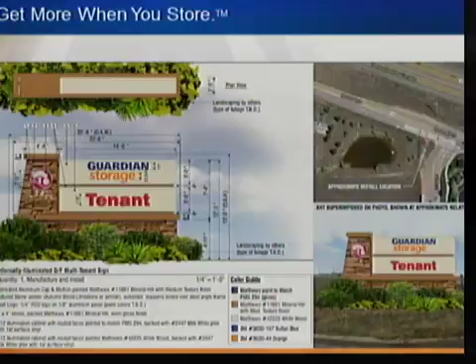One thing I do want discussed is we put two designs here, one where we would have Guardian storage on the top and a blank panel on the bottom. We've requested that until a future tenant comes in, we're able to utilize both panels of the sign. I brought that up to the Planning Commission, and it was unanimously decided.

The statement was made, well, it's Guardian's sign, they should be able to do what they want with it. But I'd like to go a little further than that for my request and give some justification for asking for that until another tenant might come in. We're going to make a significant investment in this sign.

It's going to cost, between the masonry, the sign, the site work, the landscaping, and bringing power to the sign, almost $60,000 for us. There are some significant benefits to the town. We're dressing up a corner that could use dressing up, frankly, at one of the gateways to the town. There's a drainage issue that Jim can talk about that we're going to correct through our site.

Again, we think it's a positive project for attracting developers to the area. Really, the alternative is to have a blank panel, and I just don't think, in my opinion, that is necessarily a positive thing. To me, it says recession. So, taking this all into consideration, we would like to utilize both panels until a later time.

I'm happy to answer questions when Jim is done, but I'll let him get to the engineering stuff.

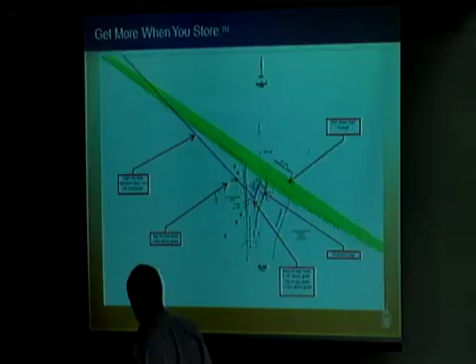A little enlarged detail, this is just the engineering plans showing curb and gutter and some new pipe work. This will be a grouted basin, so it won't be quite as attractive for snakes to hide out in there.

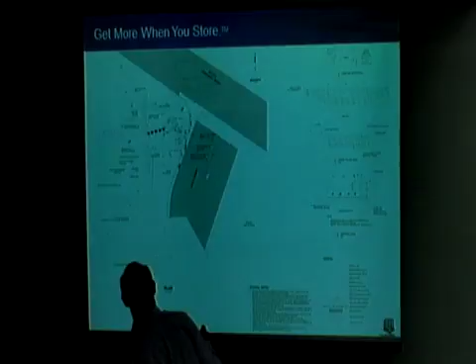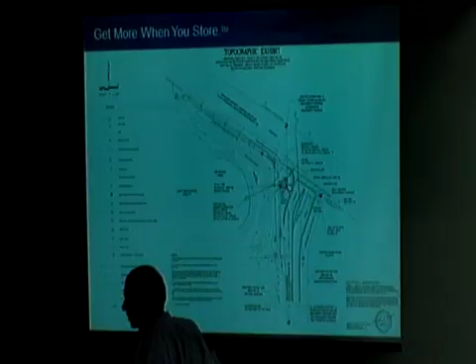This is just an exhibit of existing topography. You can see the dry utilities through here, and there's actually a legal description in the exhibit that's been prepared for the sign itself that doesn't show up at this scale.

Landscape. So as part of this project, we will landscape this corner. A lot of low water use plants will be seeded and dressed up. It won't look like the irrigated bluegrass turf that we have by Costco, but it will look definitely a step above what it is now.

It will have, there actually is a water line right here, so it'll be irrigated off of that existing main.

The plantings that were in the elevation view are maybe a little tropical. That's not exactly what is planned. I can't read these here, and I didn't prepare this plant list, but they are listed here by the landscape architect.

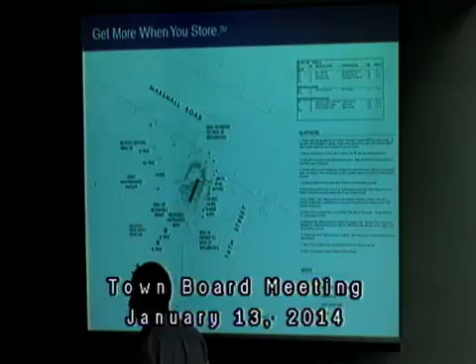So, any other questions? Trustee Gross? Actually, this is for Kevin. First of all, how's your business going?

We're very happy with where we are to this point in lease-up, and the community's really received us well. Good, and a long way to go, it's early in the game, so you got to keep your foot down, but we're very pleased. Good to have you here.

Thank you. To me, this is a no-brainer. I mean, obviously, I'm going to vote for it. I think both panels are yours. You're putting up the money. You should do it.

When a new tenant comes on board, would you hold on to both panels, or would you go back to the other design where you're on top and somebody else would be at the bottom? Because of the investment we have in it, having another developer in the area, we'd want somebody to pay us for half the cost, because I think that's appropriate and fair. If somebody was willing to do that, I don't want to say 100% certainty, but our intent is to share that panel with somebody else.

It's a significant amount of money for us to recoup. I don't really think at the end of the day, we wouldn't have done this project if it didn't work on one panel. It just wouldn't have, it'd be a waste of money. So we can make one panel work and recoup a lot of our investment by bringing in somebody else. So it's just something we want to have the flexibility to do until that time comes, because it could be a year down the road, it could be 10 years down the road. So that's why we've made the request.

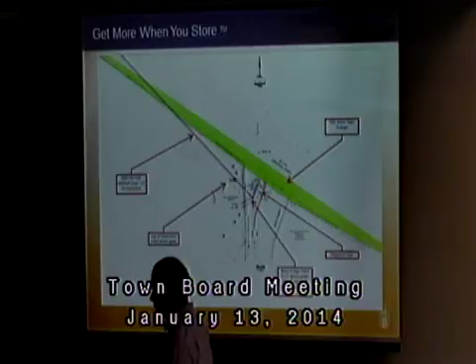Trustee Williams: Being that this is a CDOT right-of-way, I don't know how we can guarantee anything, because I've put signs there in the past and CDOT just takes them. They don't even ask, they may just do whatever they want. Sure, it's gonna be hard to take this one, but CDOT is CDOT, and that's not their right-of-way, actually.

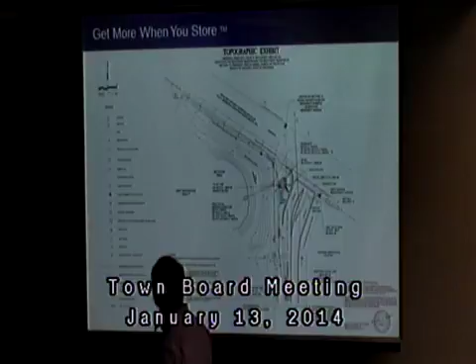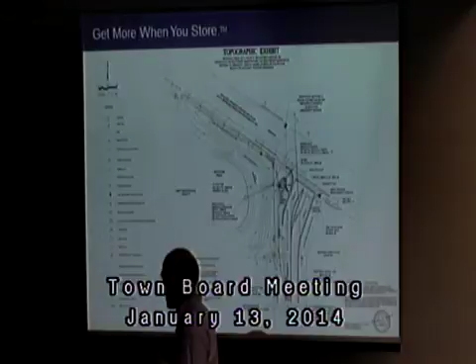It isn't? It's not, CDOT's right-of-way is right here. We do have an access permit already from CDOT, because there was a perception that potentially during construction there could be a temporary traffic impact. We also did a little bit of vegetation control on their property to evaluate our sight lines. So we do have the permit, but it's not in CDOT's right-of-way. That's good to know, so they can't just decide your sign is in their way? They can't do that, it's not in their right-of-way. Okay, that would be my only concern.

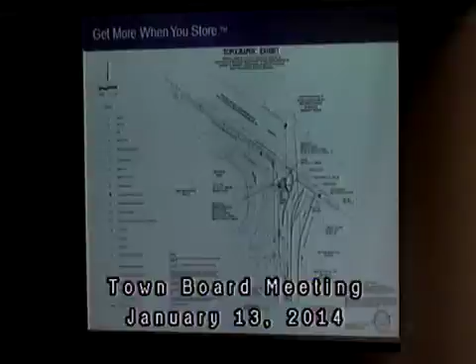Trustee Skumatz: My question is just whether the use of both placards, or whatever you want to call it, puts Guardian Storage outside the sizes that we've allotted to other businesses, and by how much? Yeah, they would have additional sign square footage just by using both tenant sign locations. I think the tenant sign dimensions match fairly closely what's in the marketplace, and they are only allowed one tenant sign per business.

So I had a couple of questions. Can you describe what the materials are? I mean it's on here, but there was some discussion at the Planning Commission about materials. I think it's the same sandstone that's on the other monument sign. The one question was on the base and the cap, I think. On this part right here, there was a concern about it looking like sheet metal, and a request was made for it to be either stoned or have a brushed finish.

And we elected for the brushed finish, as you can imagine, because it is less expensive than making it stone all the way through. But I think everything else... and I don't know what the...

Why does that need to be there? I mean, from a construction standpoint, I don't know why that needs to be there at all. Well, I don't know the answer because our sign company designed it, but I would think you need kind of a flush surface. Maybe not, I don't know. I don't remember what's in the town center, in the marketplace. I think it's stone. Yeah, it's stone. From an eye test standpoint, driving at 70 miles an hour or 30 miles an hour on Marshall Road, I don't think...

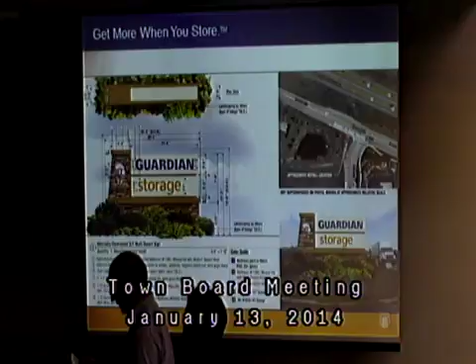We have some shrubs, Woods' rose, red twig dogwood, and white Meidiland landscape rose, and some ornamental grasses, blue avena grass, some ground cover perennials, Shasta daisy, English lavender, and deep blue lavender.

Okay, and who's... I don't know. The dogwood was helpful, I recognize at least one out of that. Well, we have specific standards in our code for plant species, and they have to pull from that list. Okay, and that's what they pulled from?

And who's going to be responsible for the maintenance of that? The town is. We're going to install it, we're going to get service to it, but the town will be responsible for the landscaping.

So that'd be unusual, because the marketplace takes care of theirs, right? The monument signs - there's certain aspects of the marketplace signs that we actually maintain. And there's certain landscaping that we maintain. It's kind of a mix and match, depending on where it's located.

I think we take care of the medians and things like that though, right? Yeah, and some - the corner monument signs, the lighting in there, and I'm not sure about the planting or the irrigation, but the roundabout, we maintain that.

What about the other signs that are along that same road, Marshall? No, those are maintained by Brixmor.

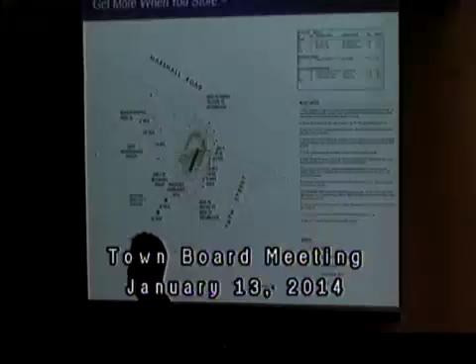Because it's connected to the CDOT facility, CDOT turns off the irrigation whenever they want, and the trees planted out there die. So now we'll be able to better control the irrigation to that landscaping, which over time will help improve the look of that whole site. No, because the CDOT site is an eyesore, they don't take a lot of pride in their landscaping. No, not so much. So whatever we can do to help, I mean, it's the gateway into town.

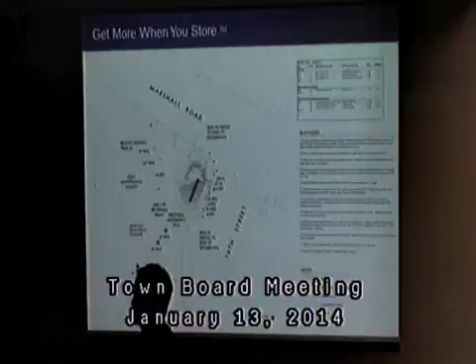That doesn't really give you a great first impression of how things are when you drive in that direction. Agreed. So you'll be in contact with the owners of the cell tower? Yes, Sprint, and we have been talking to them at the end of last year and this year, as Kevin's been advancing his proposal about extending that irrigation, getting new trees planted since they've died again, and moving forward from there. Once those trees mature, it should look a lot better than it does.

All right, so you were on top of that situation. I'm fully in favor of this, I think it makes sense. I want to make sure we have, sounds like we have some leverage, but I don't want to get into an argument, I don't want to add another sign out there, is what I'm saying. This is the only sign that's going there. And if we have a business going there, I'd want to make sure that second sign is going to become available for use.

And then my only other comment is that the sign looks a little big to me, but maybe that's just my impression. Trustee Sterling, and Trustee Skumatz, on the second panel issue, I was actually wondering how many potential developers could we have on 76th Street? Well, there's...

Four remaining property owners, privately owned: Turnbull, Way, Kelly, and then a small one acre piece, and I'm not sure who the current owner of that is off the top of my head. So potentially four developers, and if those get divided up with lots and stuff, there could be different users in there.

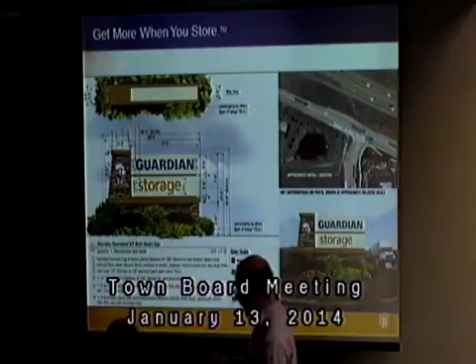It doesn't concern me even from a sight distance standpoint, because our setback of the sign, this might make sense. Our sign, the base of our sign is right here. You can see how far it is. Well, you can almost see the turn lane right here.

There's a lot of technical challenges with putting in a turn lane besides the sign, some other utilities and things, but right now it doesn't really concern me. Even if you wanted to put in a turn lane, I don't think the sign being where it is would become a sight distance problem. All right, fair enough.

All right, no other questions? Seeing none, I'll close the public hearing. And comments or action from the board?

Yeah, I agree with Ely. I think it's a no-brainer. Okay.

I would add on to what the Chamber of Commerce representative said about the support Guardian Storage has given the community. They came forth, if I recall correctly, and helped with the fire engine and the 4th of July parade. They just time and again have stepped forth in the community. So I'd like to support them as a good business in the town.

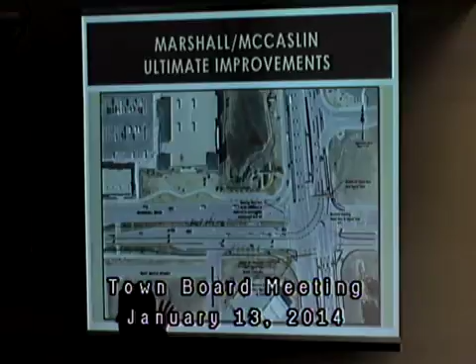We had at one time submitted an application for CDOT funding for these improvements that didn't get funded. So this is still in the plan, but I wanted to show you our current thinking, because we had a lot of discussion at the Planning Commission about what to do now.

What's happening is the DDI will be removing the median from Marshall up to the interchange—this will come out in the next month. So all that landscaped median comes out.

They need to do that because they're going to have a lot of lane shifts to put in the pedestrian overpass and so forth. So that median comes out, and instead of putting it back in, we'll put in a narrow median to set this up for a double left turn lane.

The other thing we'll be doing is moving the curb and gutter back and moving the traffic signal pole on that corner back so we can provide a bike lane—a continuous bike lane on McCaslin all the way through the DDI.

By doing that, that'll set up the triple left turn lane. What we're planning is to make this a through-left situation, so it becomes a split phase: this approach moves all together—all left turn lanes and the through movement together—and then the through movement going the opposite direction gets a separate phase.

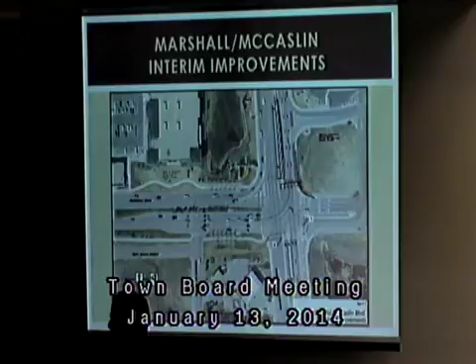They'll still have access this way, but they won't be able to get in and out there. So on McCaslin, for the rest of the corridor from the Main Street roundabout down to 128, what we'd like to do is bracket this with two roundabouts that define the limits of a slower speed corridor, so we have a roundabout at the town center and a roundabout at Indiana.

There's a lot of support for the roundabout at Indiana for people who really want to slow traffic down as you're coming through the residential portion of McCaslin. We did have wide medians to try to slow traffic down, but that concept didn't have a whole lot of support as we went through the process, so we've taken that out.

But we do want to look at potential noise mitigation in areas where houses are fairly close to the corridor, and we'll probably have a noise study for those particular areas at some point in the future to see if there's anything we can do to mitigate the noise coming from McCaslin.

How many lanes are you contemplating on the roundabouts at Indiana and the one by the town center? This one would probably be a single lane roundabout, like we have at Coalton. I don't like that. We're not going to have the amount of turning movements here that we have at the other one.

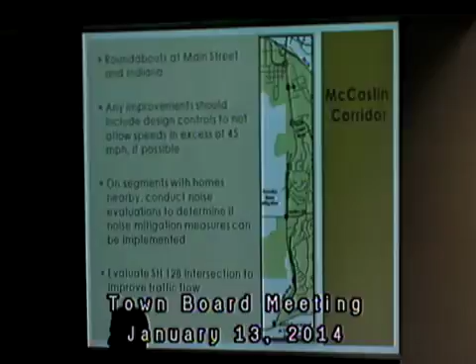If you're going straight and not turning on McCaslin though, you would have to slow down quite a bit, right? Because otherwise right now you could speed if you get the green light. There's quite a hill there that you don't want to have to stop if you don't need to, going up McCaslin to 128. If you get a line of cars and there's snow and ice on the road, it can get kind of hairy getting out of there. But I would think with a roundabout you're reducing the number of queues.

You can't put a diverging diamond there? I have some history with commuting to Rocky Flats, and way back there used to be a stop sign there on top, and most of the time that was never an issue unless you had bad weather and happened to be at rush hour with a lot of cars having to stop on the hill. They put the stoplight in - I think the state put the stoplight in. It's never needed, still isn't needed really. It's just stopping those left turners.

And there's really nothing we can do to make it harder for the traffic coming from the east that wants to turn right into McCaslin. There's really nothing we can do - the right turn is easy for them to do. Even if there's a stoplight, they stop and go. So it's kind of frustrating, I'm not sure there's much we can do to improve our situation.

So the only change - before we had a roundabout, now we're going to add a comment - we'll potentially have some improvements, but we'll look at a roundabout or other potential improvements. What's the speed limit on 128 there? It's 55. And you can put a roundabout there? That's what I was saying - that would slow it down quite a bit if you're going through. Yeah, it'll slow down through traffic. The turning traffic has to slow down - it's a sharp enough turn that you have to slow down anyway.

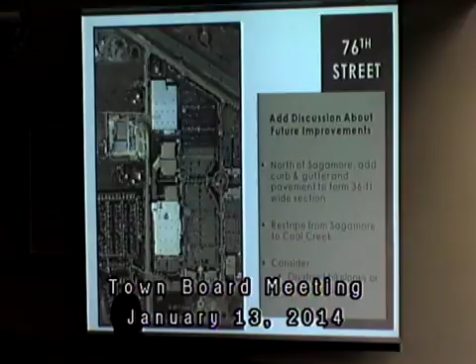In front of Sagamore, all the way down to Coal Creek, we have a pretty wide section set up as 4 lanes, which we don't need anymore. So what we're proposing is up here, have the 36-foot wide section going up to 76th.

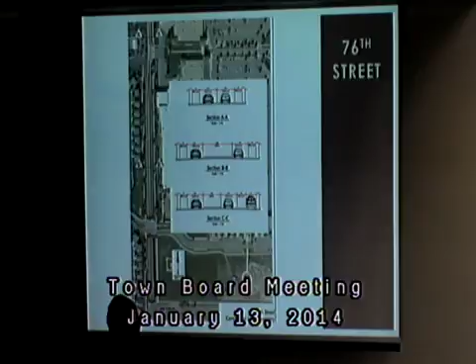In this section along Sagamore, put a raised median, through lane in each direction, and then bike lanes. South of Sagamore, add parking along Fountains Park, and have the same raised median, through lane, and bike lanes. So it's a plan for 76th Street to take advantage of the pavement we have, add some parking, add some bike lanes.

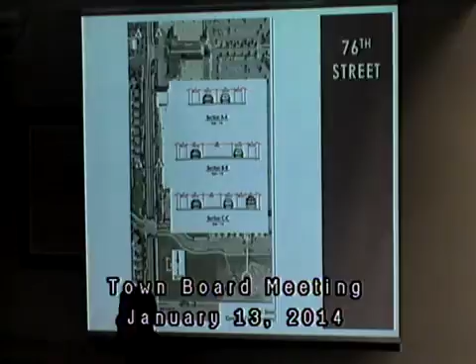The replacement of the bridge at 2nd Avenue — remember the discussions about the access alternatives — we added this section in the transportation plan, which basically said we'll replace the bridge and eventually add a leg onto the roundabout here, providing access to Rogers and potentially to South Superior as access alternatives.

Hopefully we can do that or get the emergency access down here soon. How far away, time-wise, do you think we are from having an emergency exit on the south end?

I've had discussions with the property to the south, the Shan property, which might have some conclusion next month, too. And also with the new property owner of the Rogers property, now RC Superior, the town center developer.

We've had discussions with them about potentially emergency access from 2nd Avenue to McCaslin, right where the roundabout intersection would occur. So both of those are ongoing.

Sooner rather than later, obviously. On top of that, Alex is working with Urban Drainage on improvements to the 2nd Avenue Bridge.

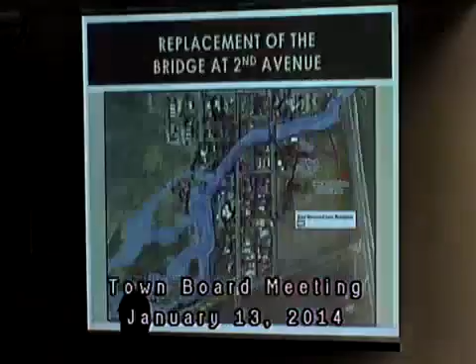On the town center, we included the revised street network from the town center. We included the connection to Discovery Parkway, and an option you'll be seeing at the concept plan for the Discovery Office Park next month, the 27th.

So you'll see how that's going to work out. A potential Campus Drive connection is also shown on page 26, with a write-up about Campus Drive and why we want to connect it.

So that's the plan, this roadway plan, and it's pretty similar to what you've seen before with those changes I've noted.

The other thing we added was an alternative modes section. We really didn't have a write-up about what we're going to do on alternative modes, though we did have some policies on that. So we added a whole section that discusses alternative modes and provides some direction.

That's found on page 31. We've enhanced additional bus service, dealing with bus stop shelters, and we have an ongoing program working with RTD to reinstitute the call and ride, which has been on our list for a number of years.

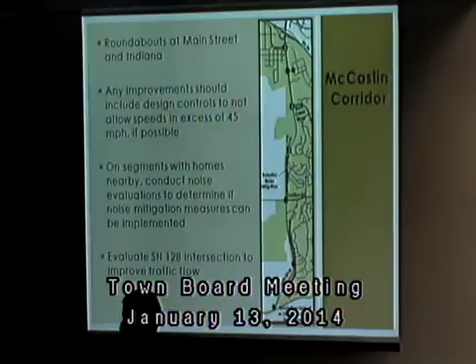Not to mention that walls impact views. Even just this weekend skiing, it was super windy, and every time you hit trees it was totally not windy. I think if they block wind, they've got to block sound pretty well too. At least with trees you get peekaboo views or something. A wall just really concerns me, and it lends itself to graffiti.

It doesn't say wall in here, we're just giving you a heads up. But I'd also like to point out that when we moved into our property, we put up 17 trees all lining our back fence to McCaslin, and we don't have the noise that the neighbors have when we go to their homes and sit in the backyard. It's a completely different experience.

So the natural state makes a huge difference if you're putting in trees and berming like you mentioned. I want to make sure we're looking toward that as natural noise mitigation, and I get that you're doing that. Maybe that's a point to put in here explicitly, because you don't know in 10 years who might be on the board or staff - it could be a whole different ballgame. If you leave it ambiguous, it could be interpreted as a wall.

We can certainly add something about more natural options, not a wall - more berming, vegetation, other than walls. I get that's where you're going, I just don't know down the road if it's left ambiguous. That's a big concern for me.

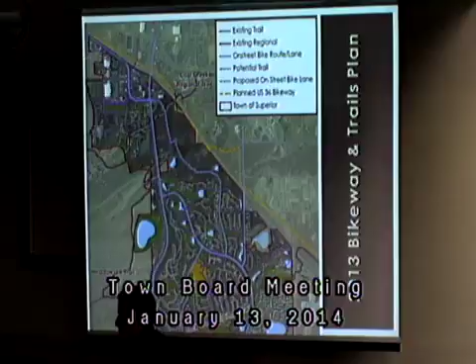Any two-legged, four-legged creature? Because in the trails plan I kind of left that off the roadway plan, but the trails plan certainly has the pedestrian corridors along there. That's on the east side though. And are those attached, or are they separate? No, just to be clear, they're detached. Thank you.

So then as I move through here, there were a few little errors, and when I come to them I'll point them out. Let's see here.

Okay, then we go to policy 8.1B, RTD services and facilities. I think it's important to note that we should reevaluate the 228 route. I know that's RTD, but it runs through our town and currently only services a third of our town, and in the future it could be up for expansion—the southern portion of Superior, or through another portion of Superior, whether it be the town center or whatever. I think we should, as a goal or policy, work with RTD on our current bus system, which is the 228. And I know we call out the call-and-ride, which we're still trying to reinstitute, but I think we should expand it to other RTD service.